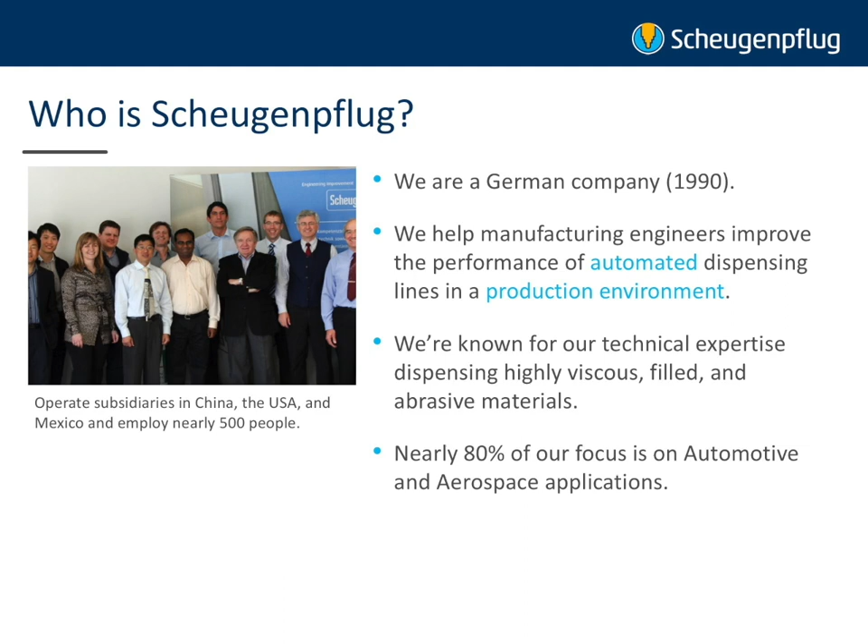Let's get started. Scheugenpflug began in 1990 as a project at Siemens to improve automated dispensing. Since then, we've grown into a leading manufacturer of adhesive bonding, dispensing, and potting systems, recognized throughout the industry for our expertise in dispensing highly viscous and abrasive materials. Today, Scheugenpflug has more than 470 employees and operates multiple subsidiaries across the globe. Roughly 80% of our business focuses on automotive and aerospace applications.

I'm sure most of you have attended webinars in the past where the presenter has tried to get you to purchase a specific product or solution. Well, that's not what we plan on doing here. This webinar is educational. The objective is to help you increase manufacturing throughput and improve dispensing yield by reducing filler damage, specifically microsphere breakage, and maintaining material quality.

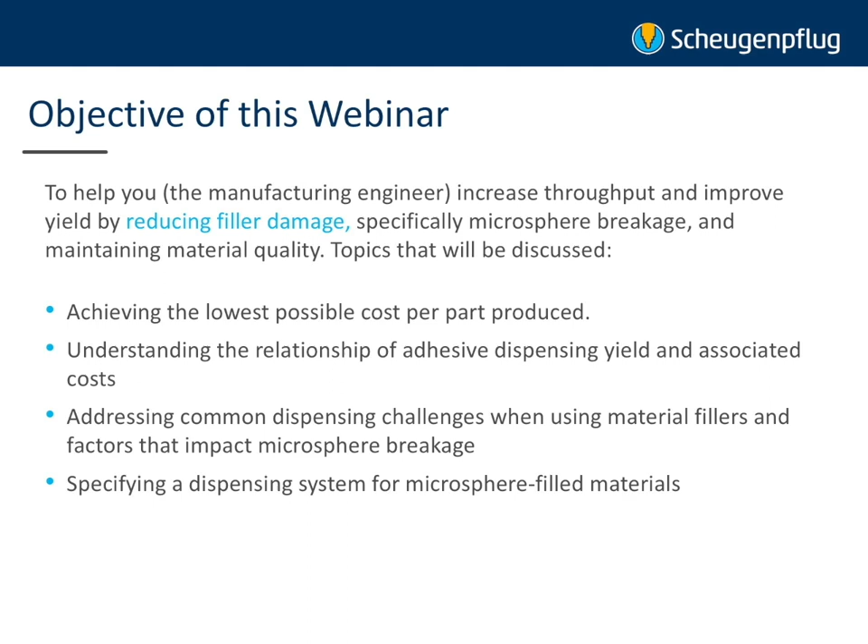Specific topics that will be discussed include the overall role that yield costs plays in achieving the lowest possible cost per part produced, critical factors that contribute to adhesive dispensing yield and associated costs, common dispensing challenges when using material fillers, factors that impact microsphere breakage, and finally, important considerations when specifying an adhesive dispensing solution for highly viscous and/or abrasive materials.

Okay, first things first. Before we get into the meat of this webinar, it's important to provide everyone with some high-level background information on the adhesive dispensing market. We've got a couple different statistics up on the screen courtesy of Grand View Research that provide a bit of context as to just how rapidly the fluid dispensing market is growing.

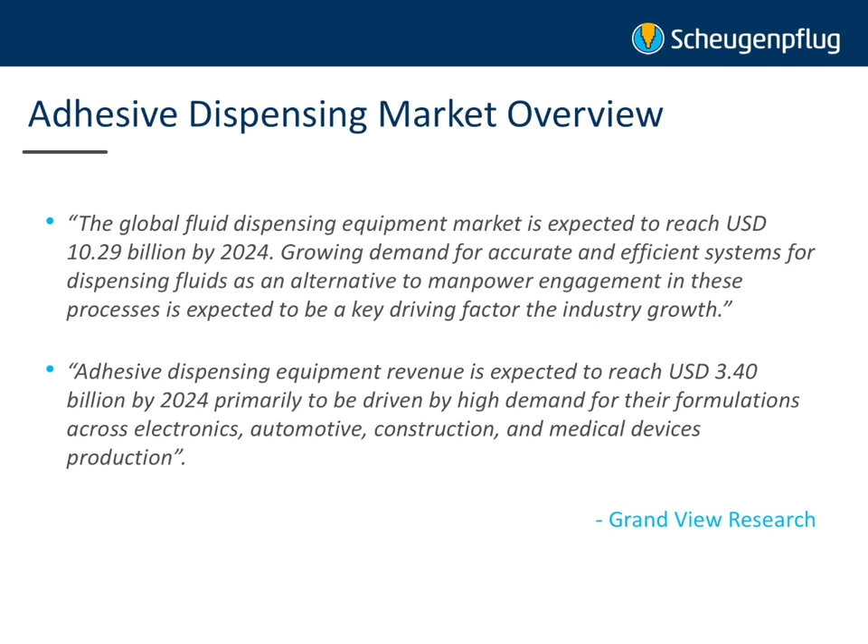According to Grand View, the dispensing equipment sector alone will eclipse $10 billion over the next 6 years, with revenue exceeding $3.4 billion. Primary drivers of this growth will include the increasing demand for more accurate and efficient fluid dispensing systems as an alternative to manual application, along with high demand for more exacting fluid formulations across the electronics, construction, medical, and automotive industries, which will be the focus of this webinar.

Over the last decade, auto and aerospace manufacturers' drive to enhance efficiency, improve part quality, and reduce costs has increased immensely. Adhesive dispensing systems play a critical role in achieving those goals, and as a result, they have emerged as one of the fastest-growing automation devices in the production environment.

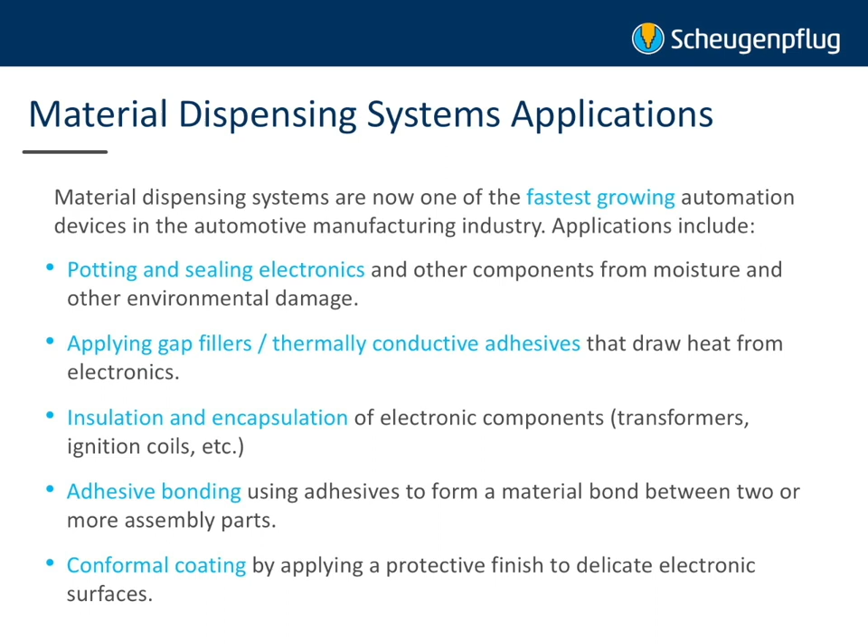Today, dispensing systems can be found at virtually every stage of the assembly process. Specific examples include potting and sealing electronics and other components from moisture and other environmental damage, applying gap fillers, thermally conductive adhesives that draw heat from electronics, insulation and encapsulation of electronic components, transformers, ignition coils, etc. Adhesive bonding using adhesives to form a material bond between two or more assembly parts, and also conformal coating by applying a protective finish to delicate electronic surfaces.

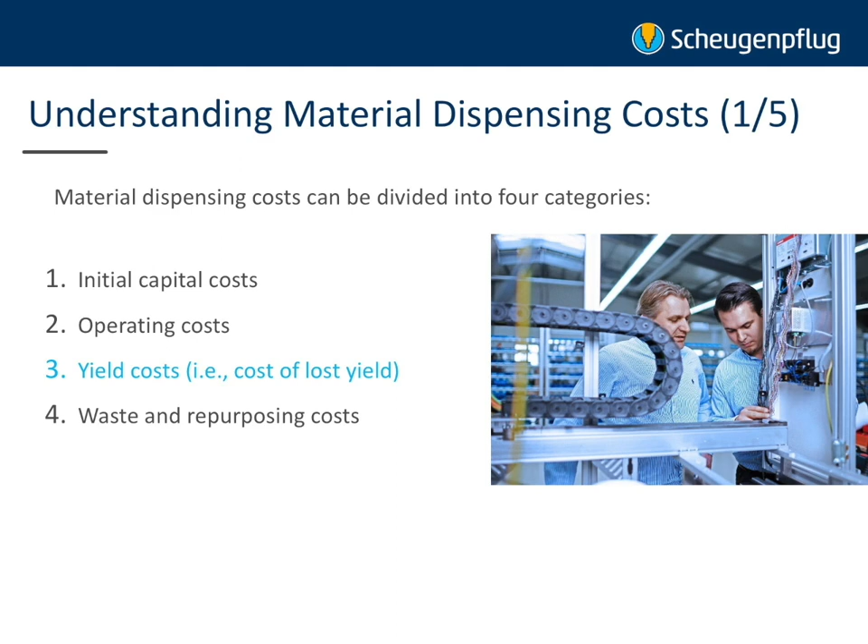Given its increased role in both automotive and aerospace manufacturing operations, properly managing the cost associated with adhesive dispensing has become critical to reducing the overall cost per part produced. Generally speaking, dispensing costs can be separated into 4 separate categories: the initial capital cost of dispensing equipment, operating costs of dispensing equipment, yield costs, or the cost of lost yield, and lastly, waste and repurposing costs.

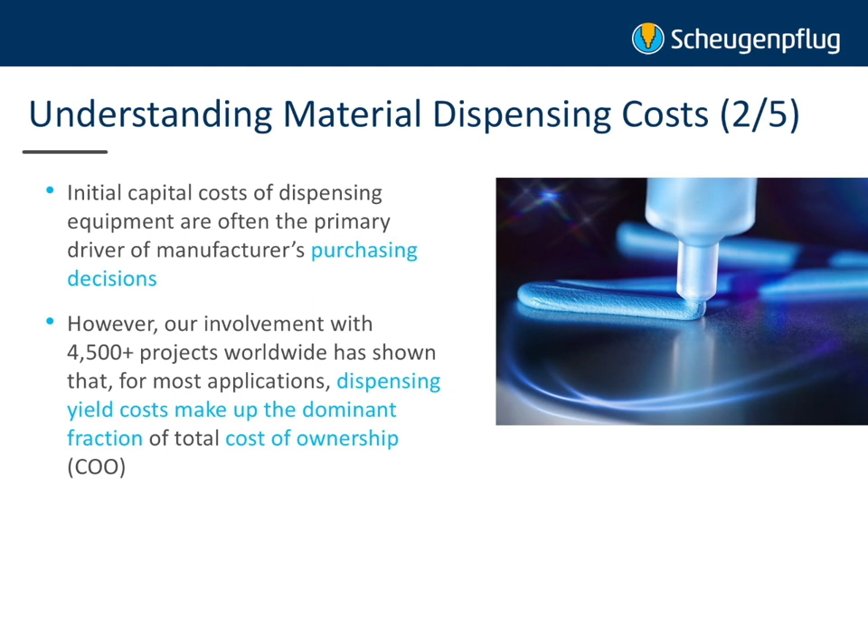When it comes to selecting a dispensing solution, many manufacturers use initial costs as the primary driver for their purchasing decisions. However, our involvement with over 4,500 projects worldwide reveals that yield costs often make up the dominant fraction of total cost of ownership, or COO as it's sometimes called. This is particularly the case in operations where expensive adhesives are needed to bond dissimilar materials or seal exposed parts, as lost yield and downtime associated with an underperforming system can quickly exceed any initial savings.

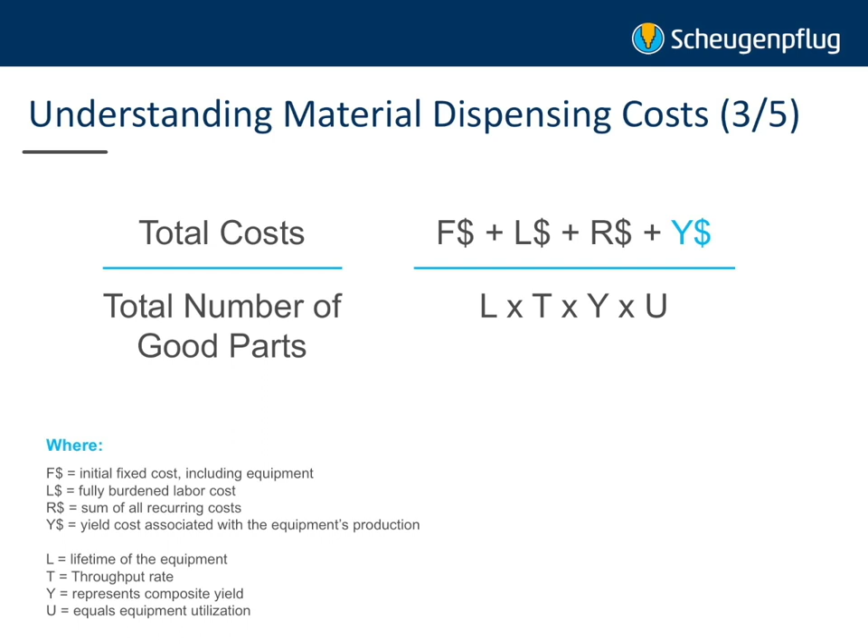Together, these 4 variables make up total dispensing costs. On the bottom of the equation, we have lifetime of dispensing equipment, throughput rate, composite yield, and equipment utilization, which is another way of saying equipment uptime.

Plugging in hypothetical values into the equation on the previous slide allows us to compare the cost of ownership, or COO, per part between the two different dispensing systems. In the first column on this slide, we have System A, which has an initial purchase price of $170,000 and a service contract of $21,250. In the second column, we have System B, which has a higher purchase price of $250,000 and a service contract of...

$31,250. System A has a 20% higher throughput than System B. However, it also exhibits a 1% lower yield. The only other difference between the two systems is the operational lifetime. System A has a lifetime of 3 years, while System B has 4 years.

The longer lifetime can be attributed to the use of higher quality electrical and mechanical components, which is reflected in System B's higher purchase price and service contract.

So when we plug all of these numbers into our dispensing cost equation, we see that despite the significantly higher purchase price and service contract, along with lower throughput, System B still produces parts that are $3.58 less expensive than System A. Over the total lifetime of the equipment, this translates into over $400,000, which is more than 5 times what the manufacturer initially saved by purchasing the less expensive dispensing system.

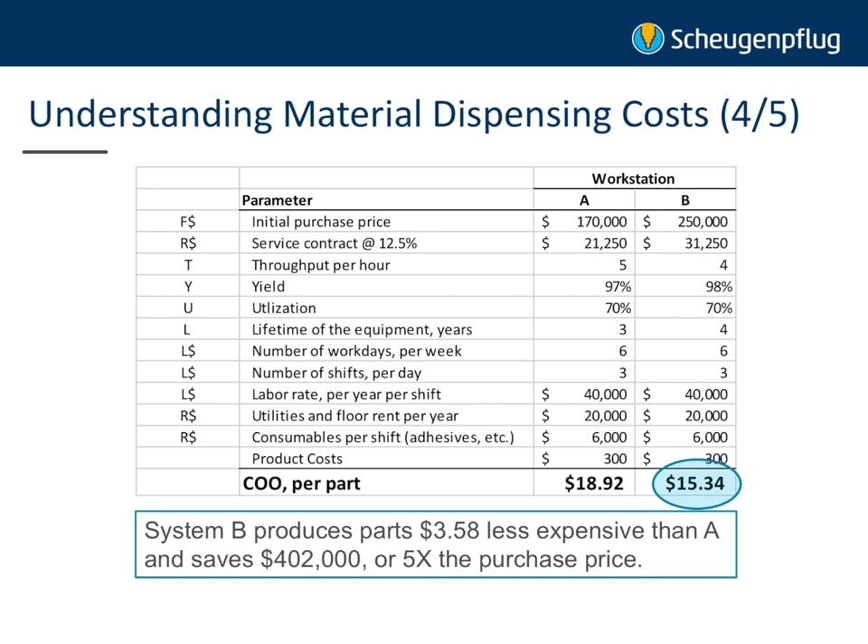By diving a bit further into this hypothetical example, we can see how dispensing costs are allocated. In both System A and System B, yield represented the majority of dispensing costs. In the less expensive System A, it was 70% of the total, and in System B, it was 57%. In both cases, the initial cost of purchasing the system made up less than 20% of total costs.

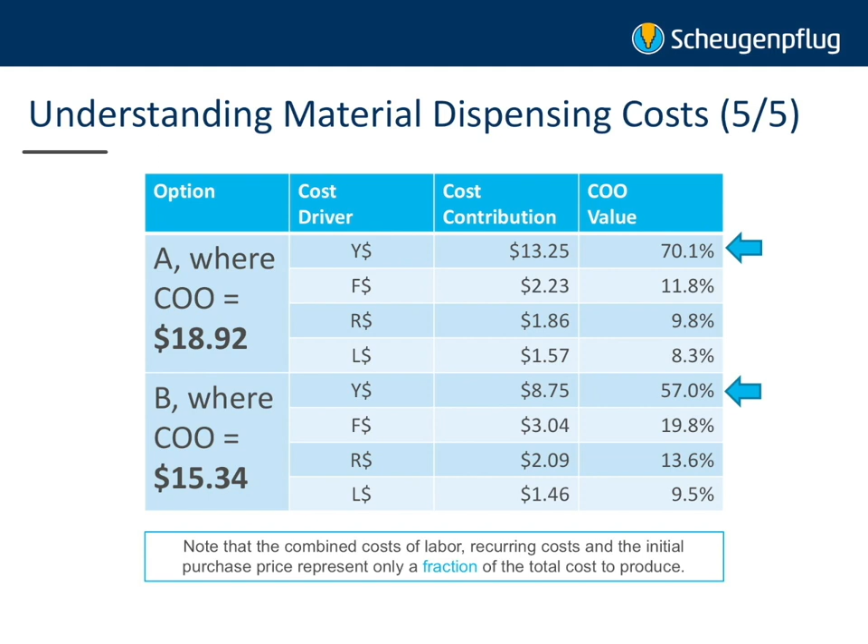The point we're trying to get across here is that when evaluating different dispensing systems, it's important for manufacturers to realize that the combined cost of labor, recurring costs, and the initial purchase price represent only a fraction of the system's cost of ownership. So if we take into account the fact that yield cost is the biggest driver of dispensing system cost of ownership, the question then becomes how we can improve yield in dispensing applications, and more specifically in those where material fillers are utilized.

Fillers are used in dispensing applications to achieve a number of desired effects. For example, glass beads are often used as spacers to ensure the minimum bonding material exists to maintain bond strength between dissimilar materials. Engineered fillers can also be used to give the surface certain properties, such as thermal or electrical conductivity. Silica-based products are another commonly used material filler that help to reduce the amount of engineered dispensing medium, which in some instances can be highly cost-prohibitive.

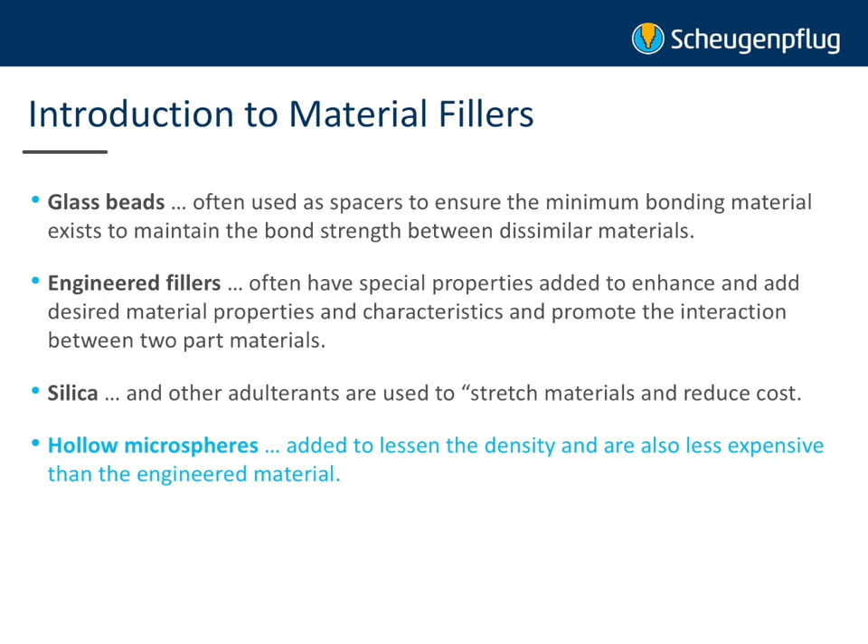Hollow glass microspheres are a particularly important material filler used in applications where minimizing the overall weight of the part being produced is critical. As we will see on the next slide, this is often the case in aviation and aerospace applications. One term that every airline part manufacturer is familiar with is the Breguet equation. The Breguet equation details the effects of weight change to an aircraft.

So in the simple calculation we have on this slide, which was done for an Airbus A320, we can see that over the course of 50,000 trips, a mere 1% reduction in mass will save 3,119 metric tons of fuel. The decreased weight improves fuel efficiency, translating into $1.6 million in savings over the plane's lifespan.

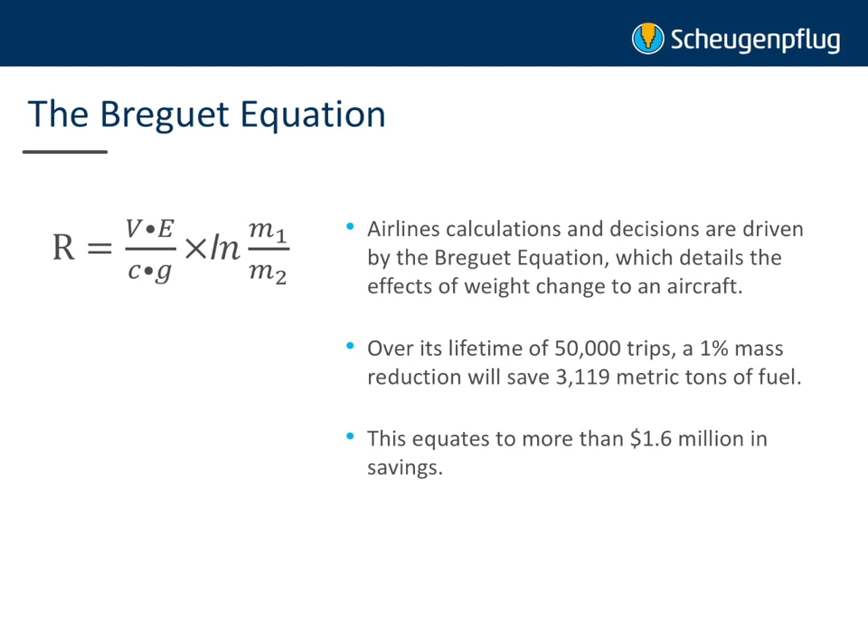Now, when you consider that many airline companies have hundreds of these planes operating in their fleet, we can see just how important it is to keep the weight of parts as low as possible. The use of hollow glass microspheres in dispensed media is one of many different methods that have helped manufacturers achieve component weight reductions by lowering the density of the dispensed medium.

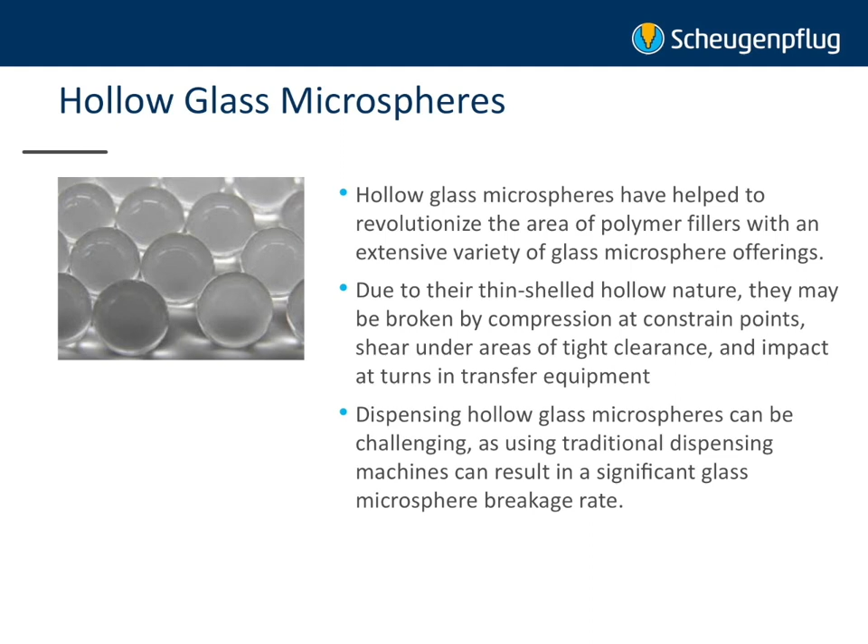When utilizing microspheres as a filler for standard material formulations, one thing that can drastically reduce yield and dramatically inflate overall costs by increasing the number of defective units per shift is breakage. This is largely attributable to the microsphere's thin-shelled, hollow nature, which makes it easy for them to be broken by compression at constraint points, shear under areas of tight clearance, and impact at turns in transfer equipment.

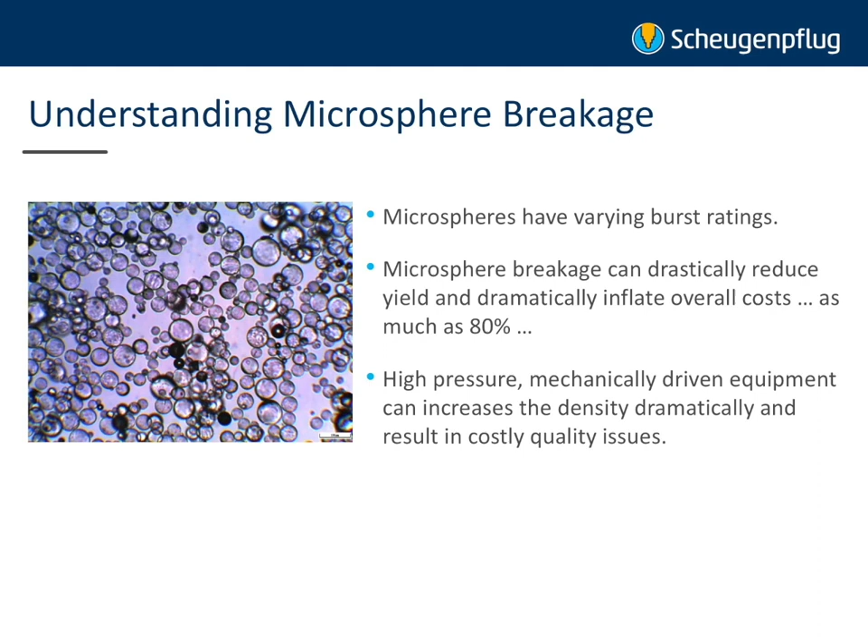Overall, dispensing hollow glass microspheres can be a challenge, particularly when using traditional dispensing machines. In fact, in some applications, a breakage rate of up to 80% can occur. Microsphere burst ratings can vary significantly depending on their specific composition. However, one of the primary contributors to breakage that we at Scheugenpflug see across almost all applications is high-pressure mechanically driven equipment, which can dramatically increase the density of the dispensed media, resulting in costly quality issues.

When specifying a dispensing solution, there are many different factors that users have to look at that will impact breakage rate and overall material quality of dispensed media. Some of the primary contributors, which we will discuss on the following slides, include system operating pressure, pump choice, material agitation, material recirculation, seals and surface finishes, and lastly, temperature.

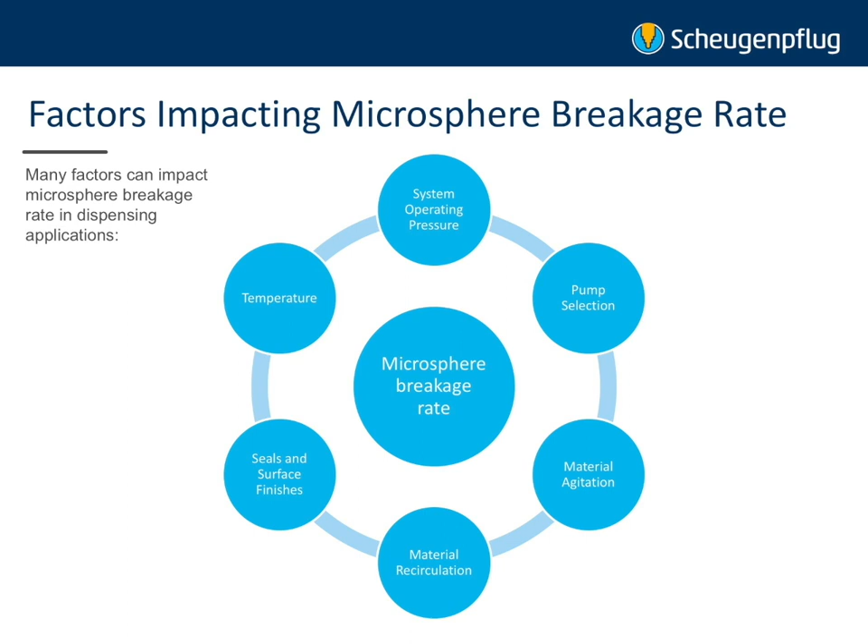One factor that can have a significant impact on microsphere breakage rate is dispensing system operating pressure. Systems that use high pressure to flow material can damage or crush fillers and increase material density. In addition to losing money as a result of the defective part, there are other consequences that filler damage can have on a manufacturer's bottom line, such as higher costs to process the heavier fluid or adhesive.

Material under immense pressure will lose homogeneity and fall out of solution, which affects the dispense speed set in automation and the desired material properties. Bonds are broken within the material, causing undesired resulting effects and properties. Now, one solution that can eliminate many of these problems is the use of low-pressure dispensing systems. Low-pressure systems can maintain flow without damaging the material and do so without the need for priming.

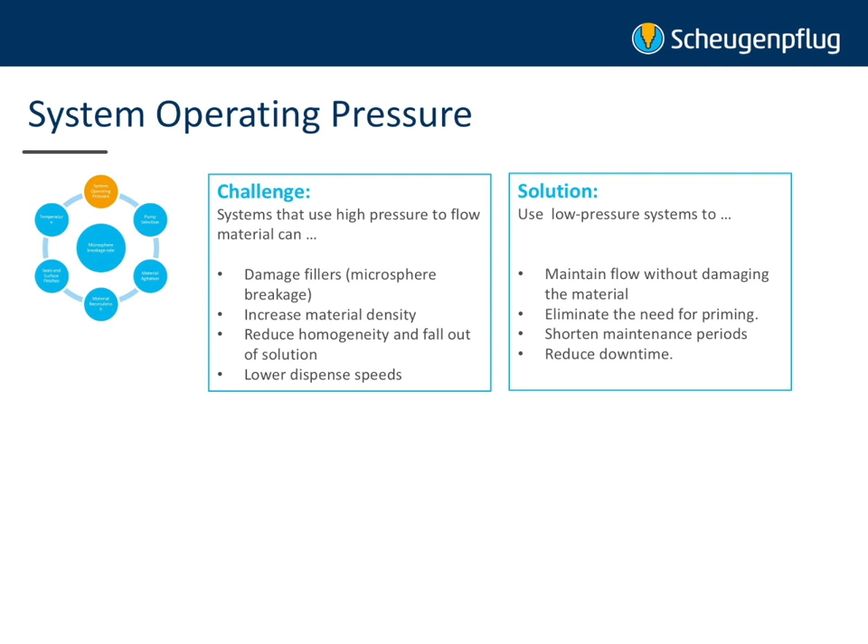Another added benefit that may or may not directly impact defective parts per shift is system safety. In most cases, fewer safety measures have to be taken with a lower pressure system, which can translate into shorter maintenance periods and less downtime.

Here, continuous loading of the material under pressure separates the liquid and solid material components. Due to their higher flowability and smaller particle size, liquid components are pushed past deposits while fillers continue to deposit. This causes the material to separate like oil and water, where the oil floats on top, as in silicone-based gap fillers. The result: the homogeneous mixture comes out of solution and is now separated, leading to changes in dispense rate.

Low viscosity constituents can escape through a narrow gap at contact surfaces where solid components tend to increase in concentration. This results in silting up of moving parts, such as valves and lines. You can see evidence of this firsthand when the silicone bleeds out onto paper. Moreover, thermal cycling of the product leads to cracking when the silicone base is forced out of solution. The result is dry slugs of filler that can lead to catastrophic failure.

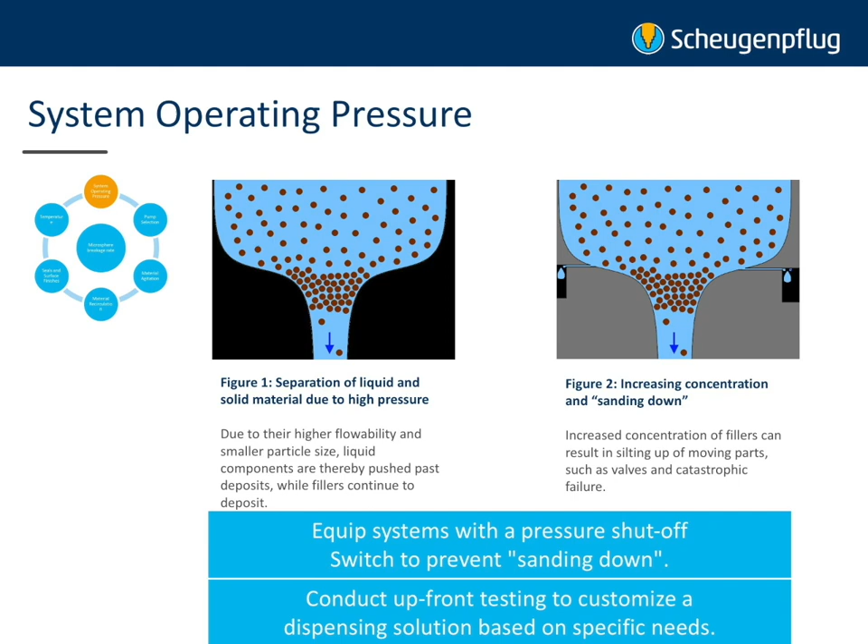Scheugenpflug recommends that when dispensing filled materials, dispensing systems be equipped with a pressure shutoff. In this way, during breaks in production, the operator can activate the pressure shutoff to prevent the described sanding down. In addition to high-pressure dispensing systems, another mechanical element that's a common contributor to material quality defects is rotary and eccentric screw pumps.

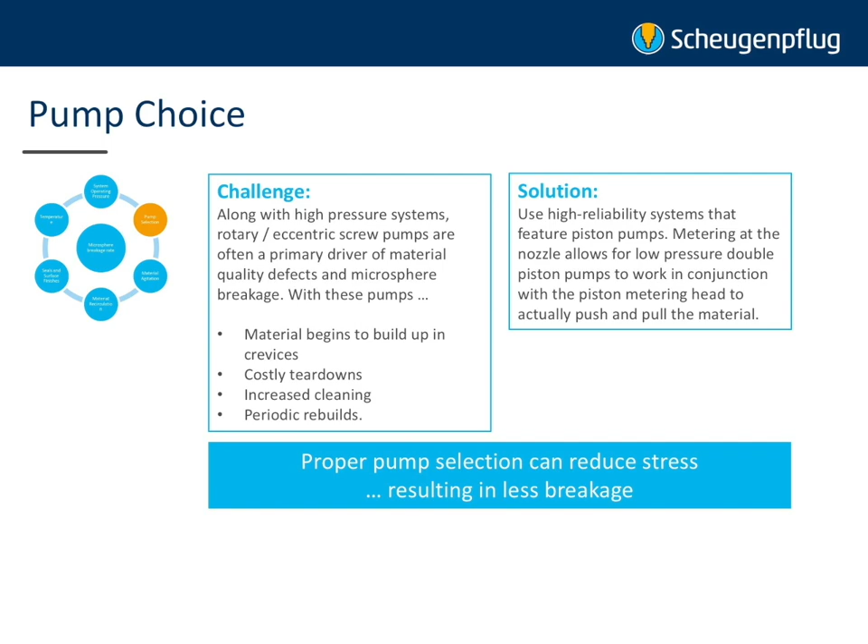With these pumps, abrasive particles are pressed into the stator, which creates a grinding layer. As material begins to build up, the rotor is ground down, leading to costly teardowns, cleans, and rebuilds, along with increased microsphere breakage. Scheugenpflug conducted an internal test, and after 30 pails of material were run, excessive wear was exhibited. After 40 pails, breakdown occurred and a costly rebuild was required.

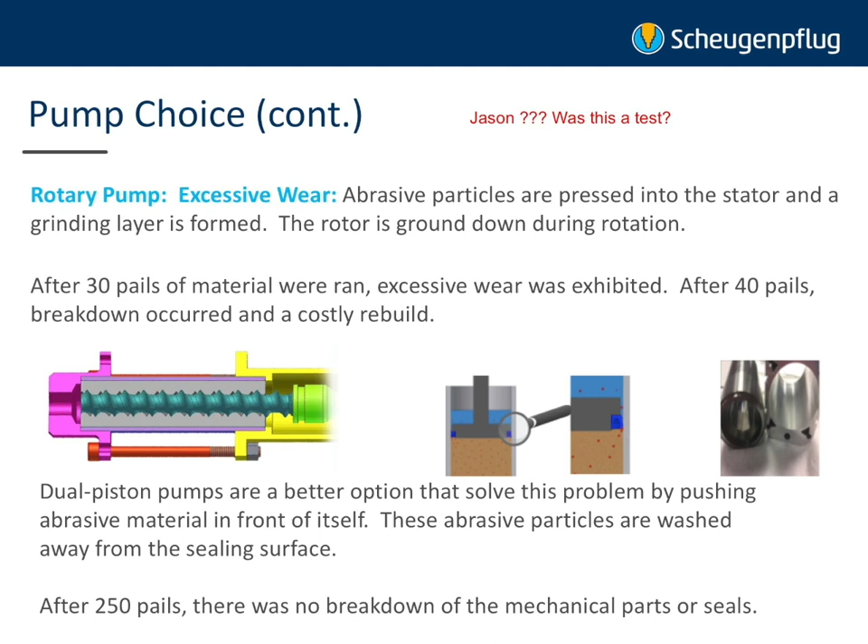Dual piston pumps, on the other hand, work in conjunction with the metering head to actually push abrasive material in front of itself. The pump comes in contact with the material on only one side, while a barrier fluid on the reverse side prevents abrasive fillers from adhering to the seals. This gives the material preparation system an unsurpassed service life when feeding highly abrasive media. The abrasive particles are washed away from the sealing surface, resulting in less stress on fillers and, consequently, less microsphere breakage. After 250 pails, there was no breakdown of mechanical parts or seals.

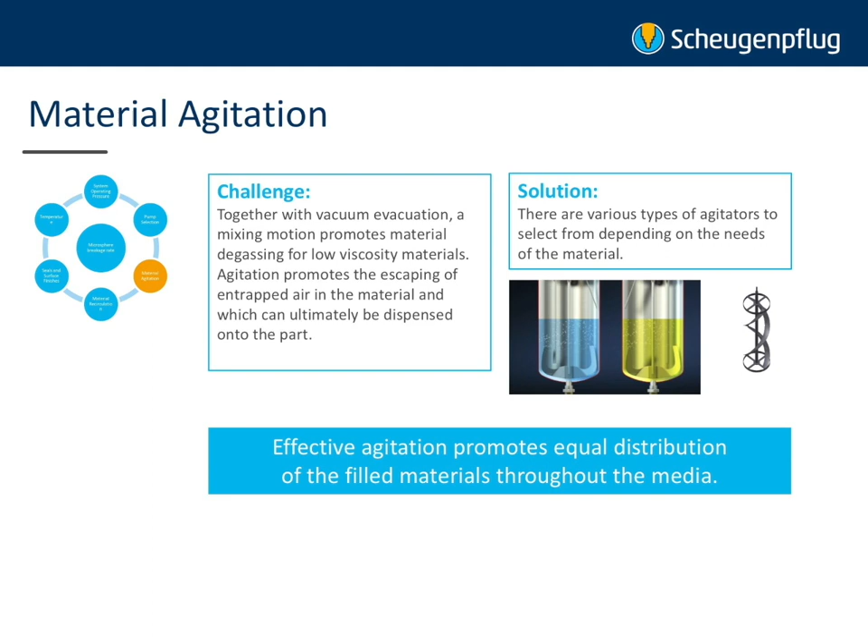Recirculation serves a similar role to that of material agitation and vacuum evacuation, particularly in dispensing applications where fillers are used. Circulation of the medium prevents sedimentation and settling of fillers in corners, lines, and hoses, which can lead to a number of costly issues, including damage to fillers and microsphere breakage. Recirculation maintains the consistency of the potting material's properties.

The degree of agitation and circulation intensity in these systems should be adapted to the material in order to maximize yield and quality. For this reason, operators should consult with an OEM to select equipment and features that meet the unique needs of their particular application.

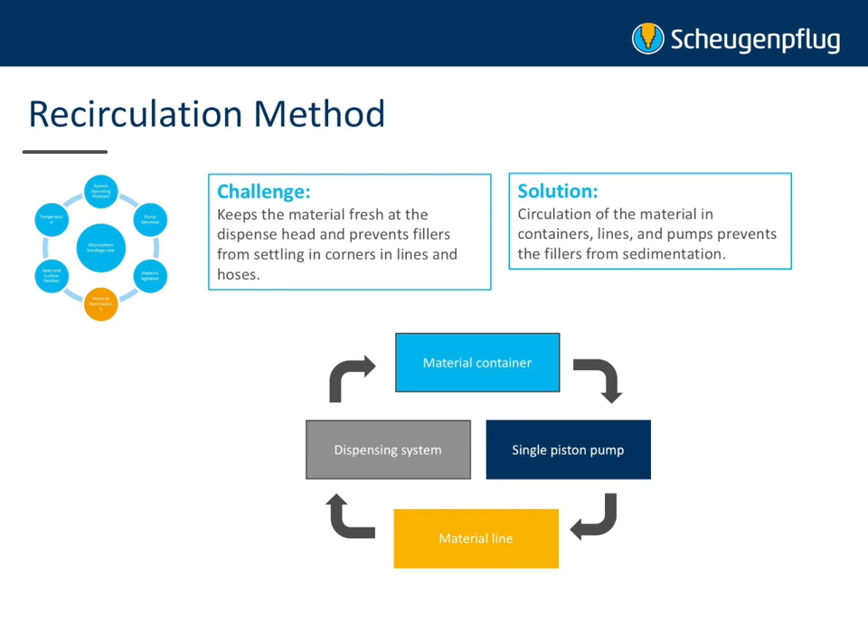Next up, we have seals and surface finishes. When specifying a dispensing solution, these are critical components to take into consideration. At Scheugenpflug, we see this situation a lot, where seals and surface finishes are not designed to handle the constant bombardment from aggressive fillers and media being dispensed.

Over time, the material damages the seals and internal surfaces, which inevitably results in the need for more maintenance, costly rebuilds, and excessive downtime, all of which increase system cost of ownership. The solution here is similar to what we've talked about previously: develop a thorough engineering design specification for all O-rings, seals, and surface coatings, and then engage with a qualified OEM who can deliver a solution that meets those requirements.

For example, in applications where cleanliness is critical, medical-grade stainless steel can be specified for reservoirs and parts to prevent contamination.

Overall, by ensuring compatibility of seals and surface finishes with the media, system owners can ensure uptime by minimizing the chance of premature degradation to internal parts.

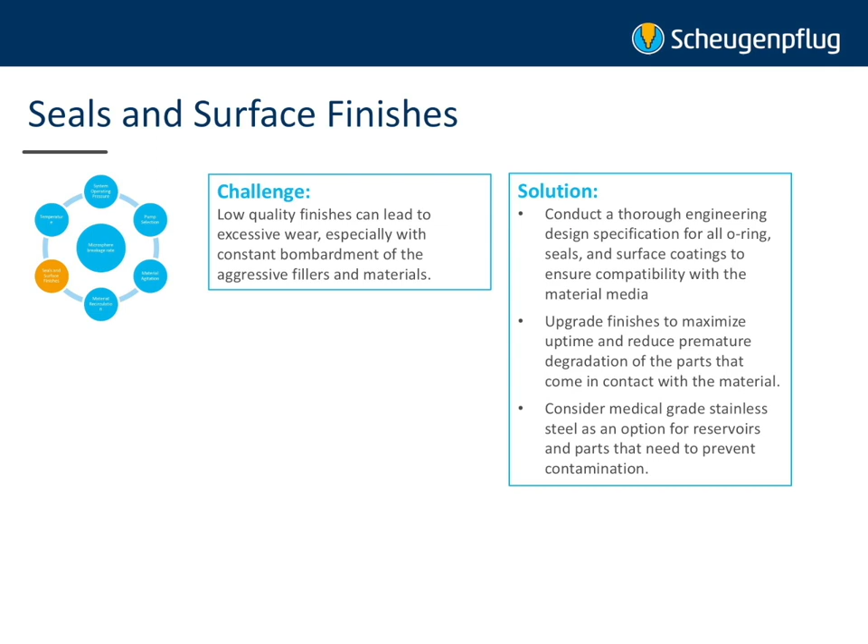And now we've come to our last bullet point on the list: temperature. Temperature plays a critical role in reducing filler damage and maintaining overall material quality. Maintaining optimal temperature, however, can be a balancing act.

For instance, increasing temperature in a dispensing system improves the dispensability of higher viscosity and two-part materials, such as gels or pastes. However, it also makes it easier for materials to separate, which can lead to costly defects. In many cases, high temperatures will also promote premature curing when components are mixed.

Similarly, for some one-component systems subject to heat curing, the material pot life is changed. The solution for this is to make sure that the optimum temperature is maintained for the material being dispensed.

This will ultimately ensure quality and minimize filler damage that may be caused by changes in ambient conditions from day to day or season to season. The better material flow rate and improved quality will ultimately outweigh the shorter material working time to the benefit of the process. Again, this is something that operators can easily achieve by engaging with a qualified dispensing solutions provider.

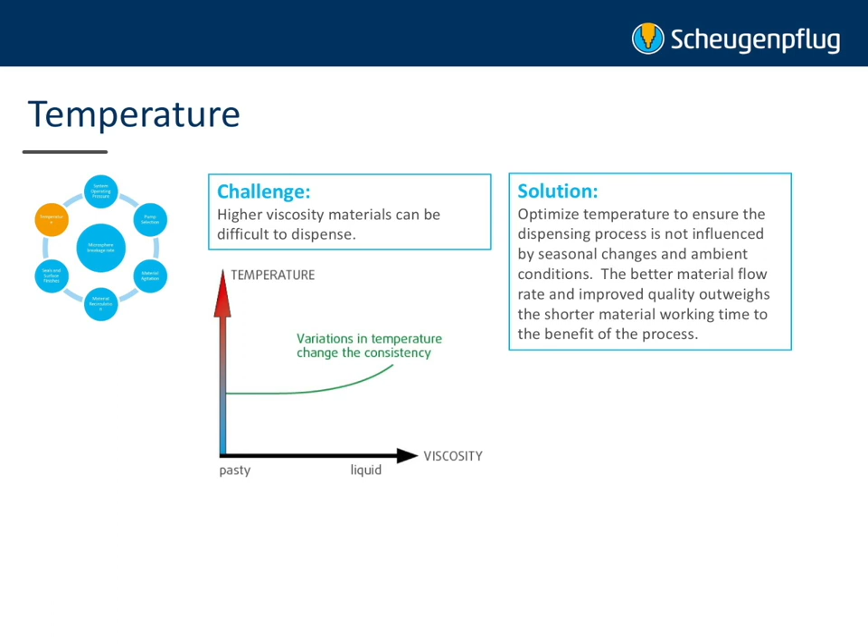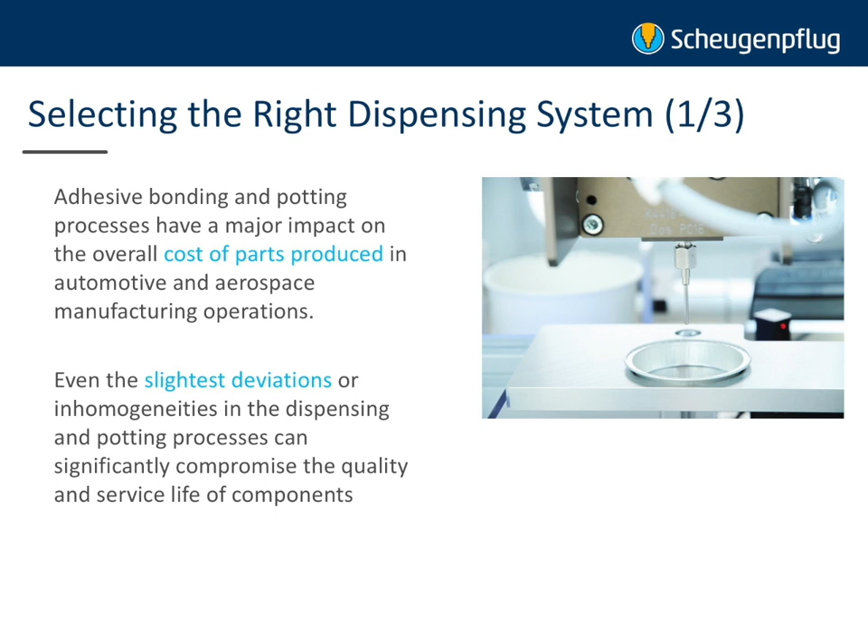Overall, the most important thing we want listeners to take away from our discussion today is that the adhesive bonding and potting processes have a major impact on the overall cost of parts produced in manufacturing operations. Even the slightest deviations or inhomogeneities in the dispensing or potting processes can significantly compromise the quality and service life of components.

Ultimately, determining which dispensing solution is the right one for a particular application depends on a number of factors. In addition to the equipment itself, the materials used, the user potting requirements, the potting properties, and the integration of adhesive bonding, dispensing, and potting processes into the production environment all play an important role.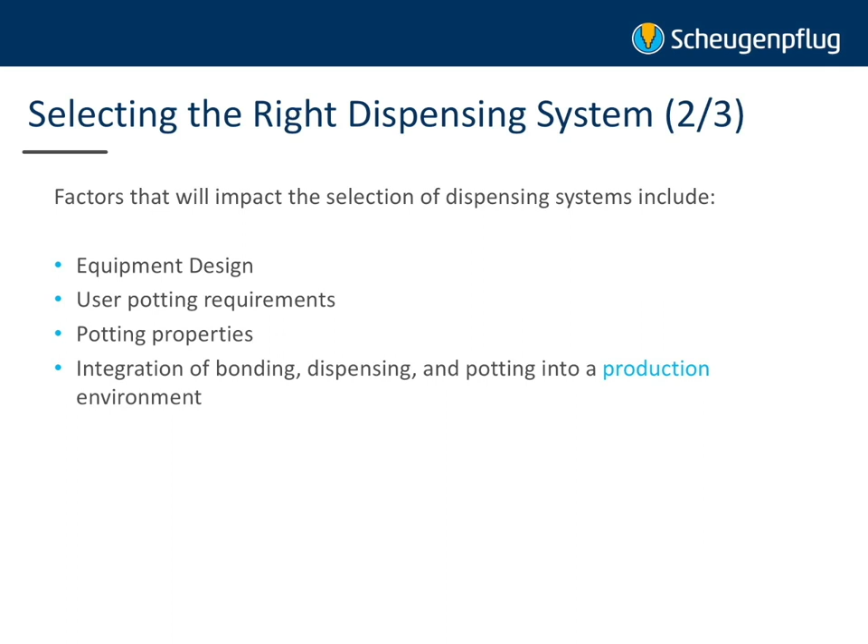One particular solution that can be advantageous in applications that feature highly viscous and/or abrasive material feeding is a vacuum follower plate. The vacuum follower plate is specifically designed for feeding high viscosity potting material from a hobbock or pail. The plate is made of polyethylene, which guarantees appealing sliding and manufacturing characteristics that aid in the production process.

Polyethylene also provides exceptional material compatibility with the most frequently used potting media. The air trapped between the plate and potting material surface is drawn into the plate by a vacuum during docking. This prevents the air from entering the potting material or disturbing the feeding process. It also levels the surface, which facilitates a constant material flow.

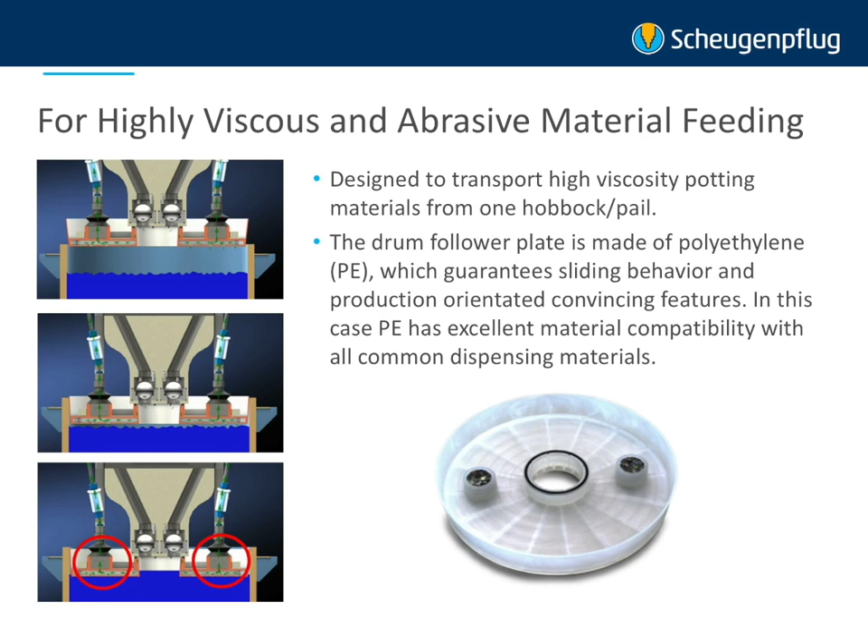In the process, the potting material is pushed through the center opening into the feed lines. A fill level measurement system ensures that the drum is emptied completely. Because the plate is a single-use item that is disposed of with the empty pail, the new material is not contaminated with dry material residue.

Metering head design is also critical when specifying a dispensing system. For example, in some applications, operators can benefit from utilizing gear pump dispensers, in particular due to their continuous, high-precision material application, as well as their high dispensing speeds, even in the case of complex workpiece geometries.

The gear metering pumps provide the needed flexibility for potting different workpieces or for varying material quantities. Dispensing is completely uniform, even at high inlet pressures. In addition, these dispensers provide very careful, low pulsation feeding of shear-sensitive and high-viscosity potting media.

Volumetric piston dispensers are an option, particularly in applications using filled or abrasive materials such as 1C or 2C casting resins. Volumetric dispensing offers several advantages. Since the material quantity to be potted is mechanically determined in this case, dispensing accuracy does not depend on the temperature, material feed pressure, or viscosity of the casting resin.

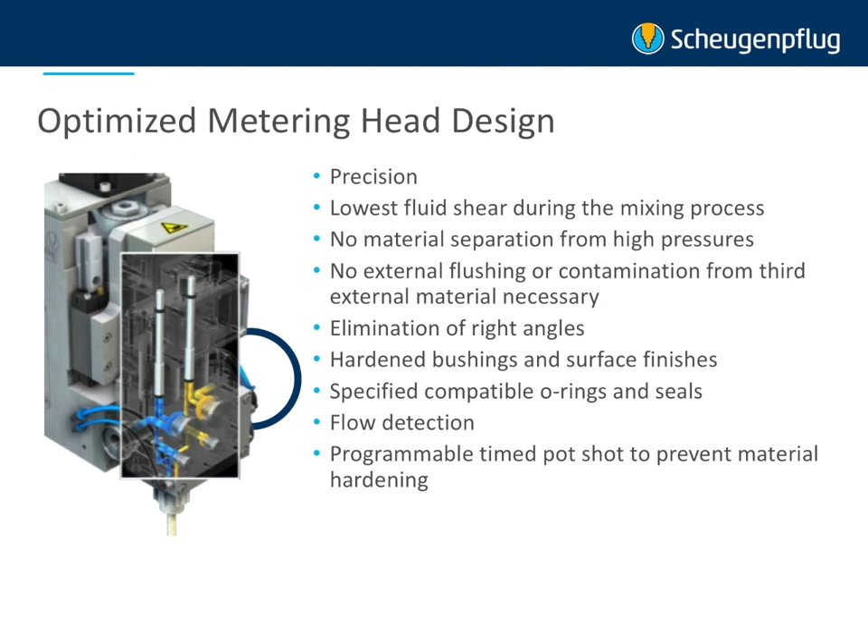This is not the case when it comes to other dispensing methods, such as dispensing by determining mass or by measuring time. Moreover, volumetric piston dispensers are available in different sizes and models and can therefore be adapted precisely to the particular potting task.

Overall, when specifying a dispensing system for a given application, it is important for operators to understand that it's not a matter of one size fits all, but rather which solution is optimal given the unique requirements of the user and the process.

To fully understand the dispensability of your material, manufacturers should consider getting a lab test done. These tests greatly assist in setting expectations and enable operators to zero in on the specific type of equipment needed to flow correctly and maximize yield.

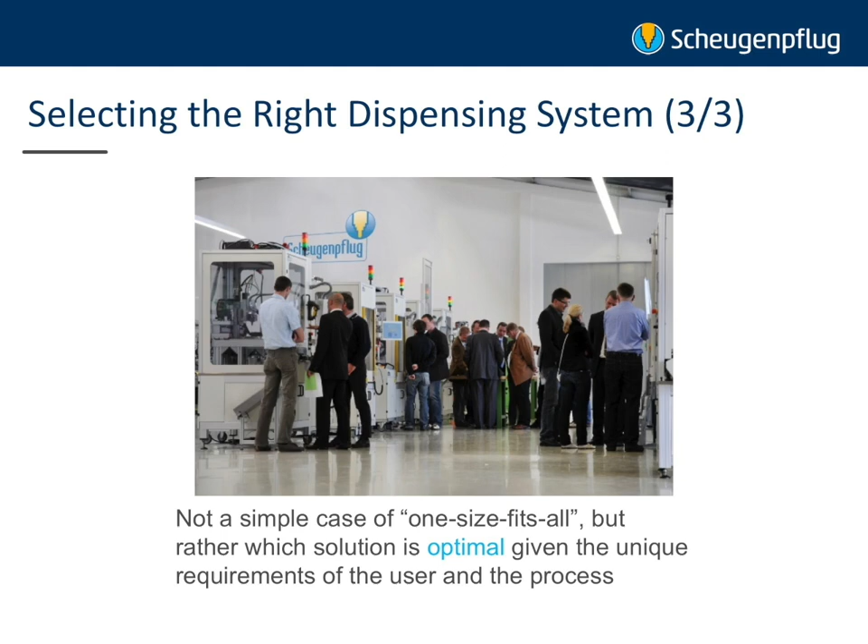The test can usually be conducted in a single day and is an invaluable step in reducing overall dispensing costs. In the end, to fully understand what your dispensing process is capable of, you really need a dispensing engineer to evaluate it. At Scheugenpflug, we offer a free evaluation, which usually requires a 30-minute discussion over the phone.